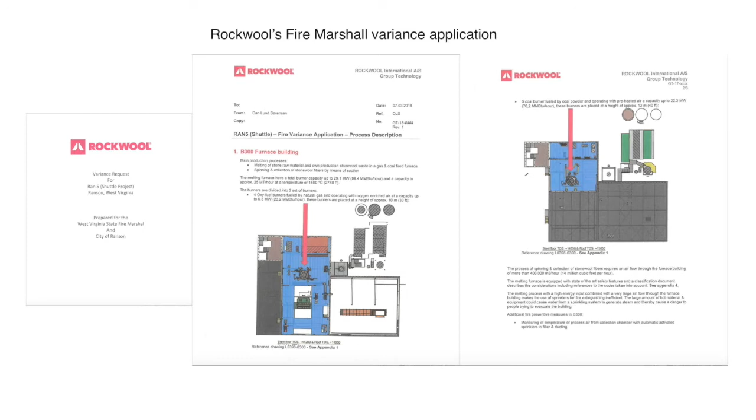Rockwool has always planned to use coal in two ways at the melting furnace: as fuel for operation of coal-fired burners and as raw material. These diagrams are from Rockwool's Fire Marshal Variance application. Notice there are two types of burners for the melting furnace: 4 natural gas burners and 5 coal-fired burners.

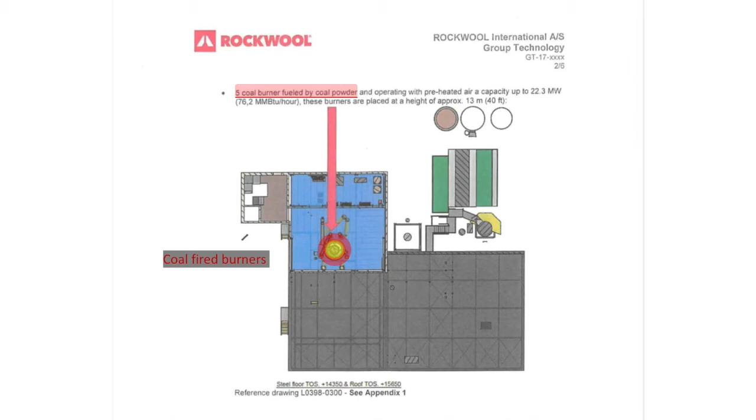These are cross-sectional, top-down diagrams. Here we see the melting furnace, surrounded at 13 meters by coal-fired burners. This diagram is from Rockwool's 2018 Ranson open house. Notice coal is listed as a raw material.

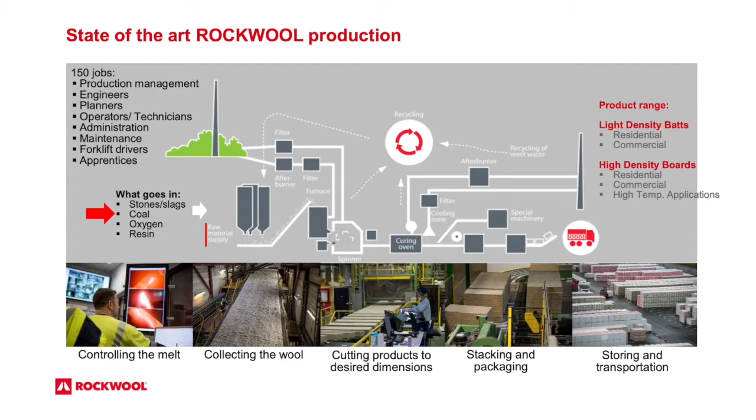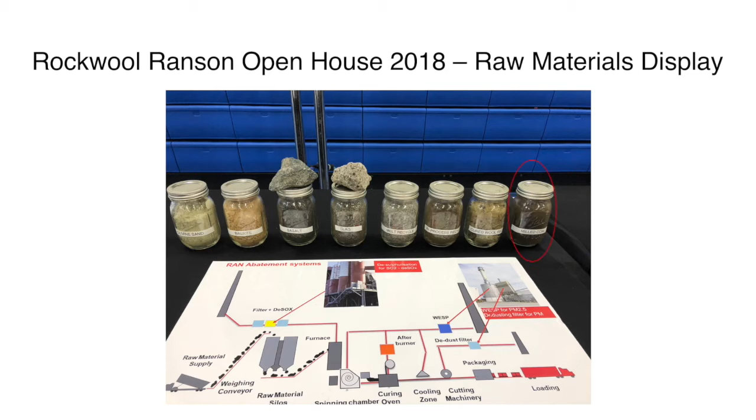And here, coal can be seen being delivered to the melting furnace with other raw materials. This picture is from the open house showing some raw materials. Notice the coal. To recap, Rockwool always planned to use coal in two ways at the melting furnace: as fuel for operation of the coal-fired burners and as raw material.

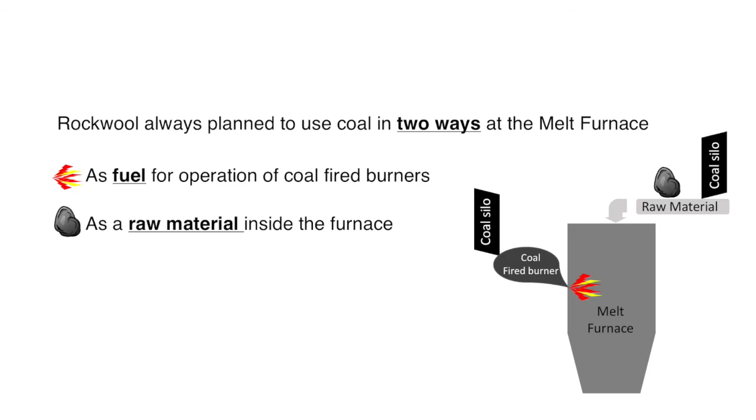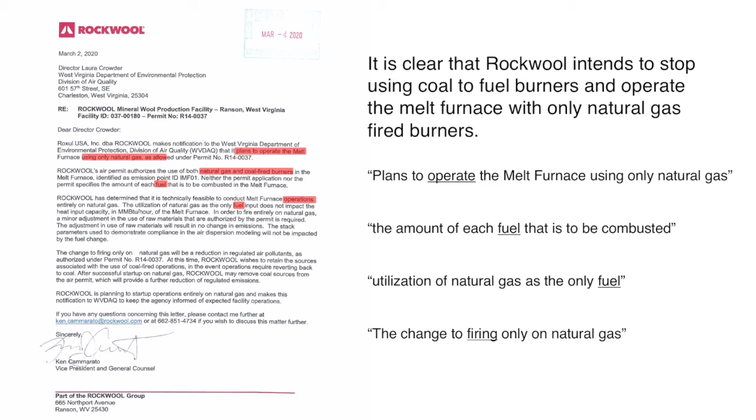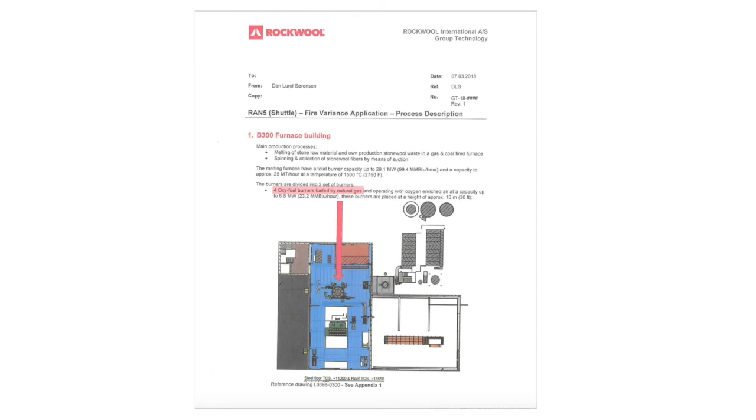Now let's look at what Rockwool said it would do in its letter to the DEP. It is clear Rockwool plans to stop using coal-fired burners at the melting furnace. They will go from using coal and natural gas burners to using only natural gas-fired burners at the melting furnace. So what is being done with the coal used as raw material?

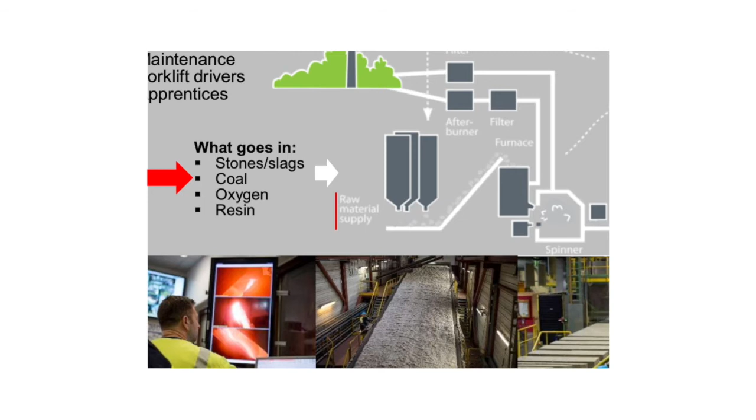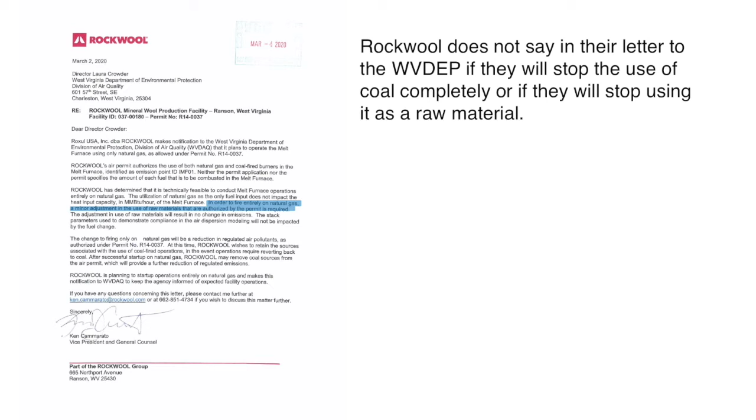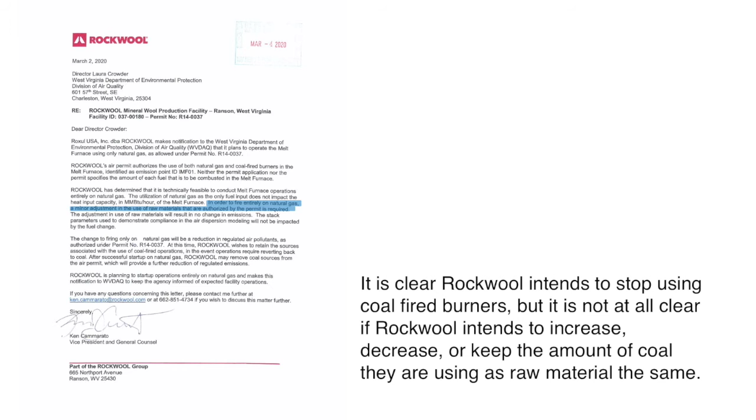It does not say in the letter what will be done with the coal used as raw material at the melting furnace. In fact, Rockwool states, in order to fire entirely on natural gas, a minor adjustment in the use of raw material is required. Therefore, it is not clear if Rockwool will increase, decrease, or not change the use of coal as a raw material at the melting furnace. Why don't we know for sure? Because the DEP didn't ask.